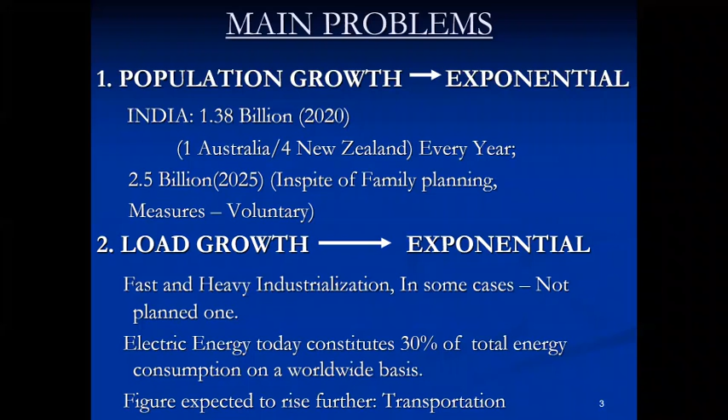Well, our stable government under Mr. Modi is quite stable. The political situation is good, so we can plan strategies and priorities and work for energy and environment. By 2050, there will be only solar and wind - 150 gigawatt solar, 150 gigawatt wind.

There have been four conferences in the world. First was Rio in Brazil. Second was Kyoto in Japan. Third was Paris in France. Fourth was Glasgow in UK.

All these conferences tell us to stop using coal, so that there will be no ash, no emission dispatch, greenhouse gases, CO2, SOx and NOx. All these gases are bad for the health of the people as well as for the buildings.

These gases are raising the sea level. Tomorrow there may not be Bombay, there may not be Madras, there may not be Sri Lanka. We don't want that to happen. We need to have Bombay, we need to have Madras, we need to have Sri Lanka there. So let us stop using more and more greenhouse gases.

Emission dispatch is a very important topic in electrical now, not economic dispatch, because we have to minimize these gases. Similarly, voltage stability is more important than angle stability, because if voltage is within limits, all the equipment will work very well.

Power crunch is a harsh reality since many years for many third world countries, especially non-oil producing, non-OPEC countries. There is no city or village in India where there is no power cut. It varies from 0 to 24 hours.

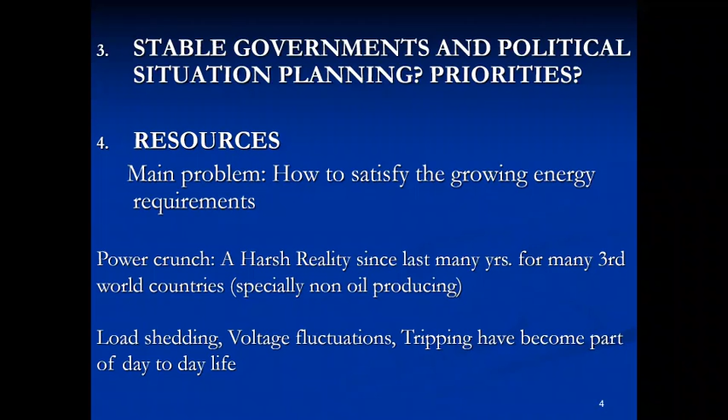Per capita energy consumption: ours is 1200 kilowatt hour. Highest in the world is Norway and Sweden. Australia is this much, USA is 12,632 kilowatt hour, and so on.

So we want to become at least better than China. China is 4,000, so we are trying to go towards 4,000 kilowatt hour per capita energy consumption.

Three conservations are important: energy conservation, food conservation, water conservation. There is no water in Sun City in South Africa. Even in India, as per the NASA report, 10 cities will not have water after 10 years - Nagpur and Chennai are two of them.

So what we should do is have rainwater harvesting and a photovoltaic station on every rooftop. Every house in India should have photovoltaic - India here means the whole third world. We should have photovoltaic power stations and rainwater harvesting, so that we have water as well as electricity.

Then we should have a smart meter, two-way, so that if you sell power, you get money, and if you purchase power, you have to pay money.

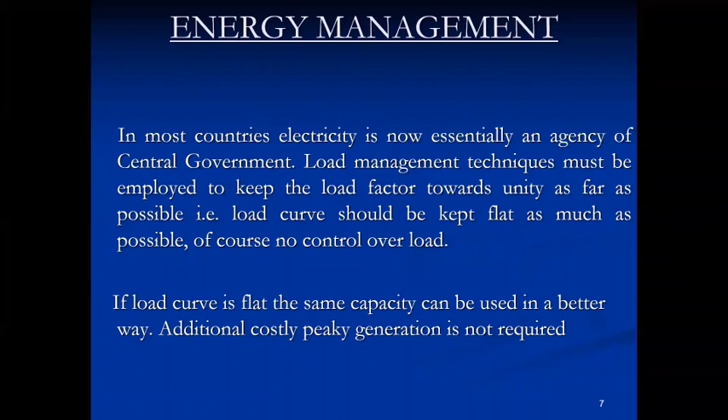Next slide please. Total electric installed capacity.

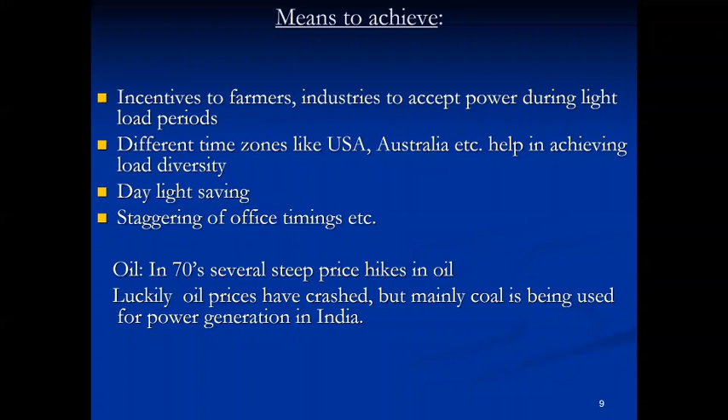As I told you, in 1947 we had 1130 megawatts. Now we have 280 gigawatts - a lot of progress. And there is thermal, hydro, and nuclear - all 3 conventional power.

All 3 are bad. Hydro is bad because we need a lot of space for reservoirs, then there's navigation loss, then there's evaporation loss. Thermal is bad because of pollution, because of acid rain - sulfuric acid H2SO4 and nitric acid HNO3.

So we go for cogeneration, we go for combined cycle power plants. But still thermal is not good, so we go to hydro. Hydro we already have, as I told you, 65 hydro power plants.

And in nuclear, we started in 1969 with the help of 2 great geniuses - late Pandit Nehru and Dr. Bhabha. Tarapur was helped by the US - we used to get enriched uranium, U-235, from US. But then there was a problem with enriched uranium, so we shifted to Kota. Kota was with the help of Canada, using heavy water. The third was Kalpakkam near Madras, 4th was Surat, 5th was Aligarh. In all, now there are 10 nuclear power plants.

Now we have signed a nuclear deal with USA under Dr. Manmohan Singh's prime ministership in 2008, in the Indian Parliament. So now there is no problem in getting enriched uranium. Now we have 100,000 tons of thorium in Kerala and Orissa, so we can use fast breeder reactors and use thorium to generate nuclear power.

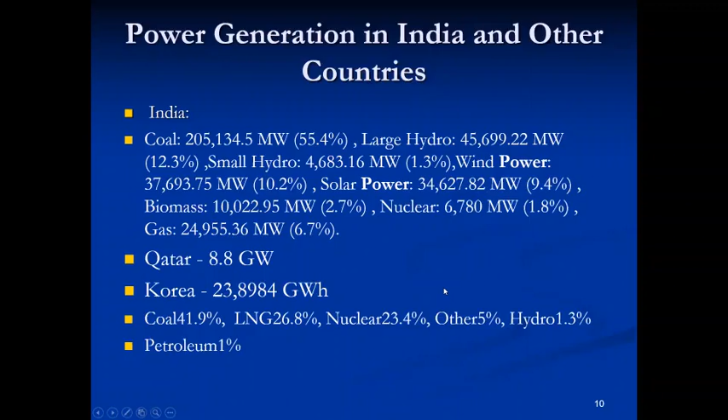1072.46 gigawatt: natural gas, coal, nuclear, wind, hydro, solar, biomass, petroleum, geothermal. Geothermal is there, though 0.4%. Others is 0.4%. Pakistan 148.25 gigawatt: furnace oil 14%, natural gas 31%, coal 16%, hydroelectric 29%, nuclear 4%, renewable solar and wind 5%, and so on.

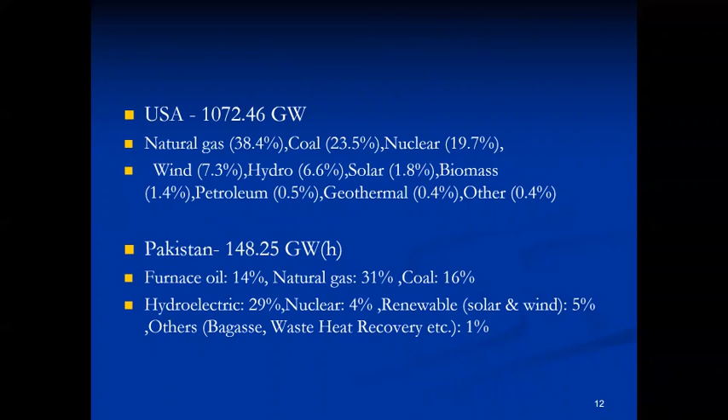Next slide, please. Germany 631.4 terawatt hour. Nuclear is still there. Brown coal is available in Australia - they say you can take it free, but we don't want it, we said no. Hard coal, natural gas, wind - of course Germany has a lot of wind power. Solar 9.1%, biomass 8.7%, hydro 3.7%.

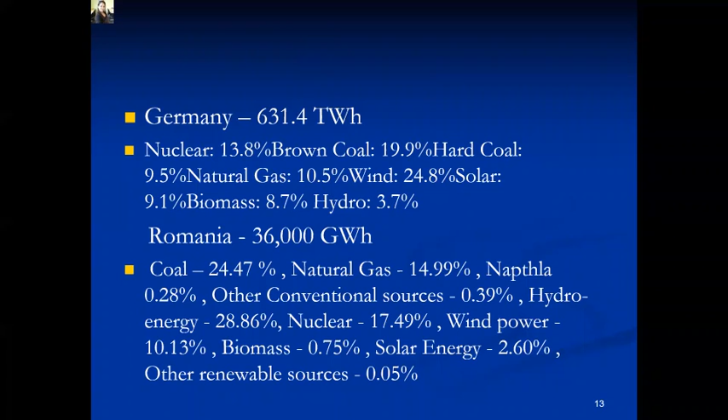Romania 36,000 gigawatt hour, coal. All these things are given, you can read them later.

Next slide, please. Excuse me, Dr. Kothari, we have something like 25, 30 minutes. You want to get to the research? Whenever you say, give me 5 minutes, I'll finish. You don't have to finish, but would you talk to us about research issues? About what? Research issues, recent issues. Okay, yeah, fine, this will finish in 10 minutes.

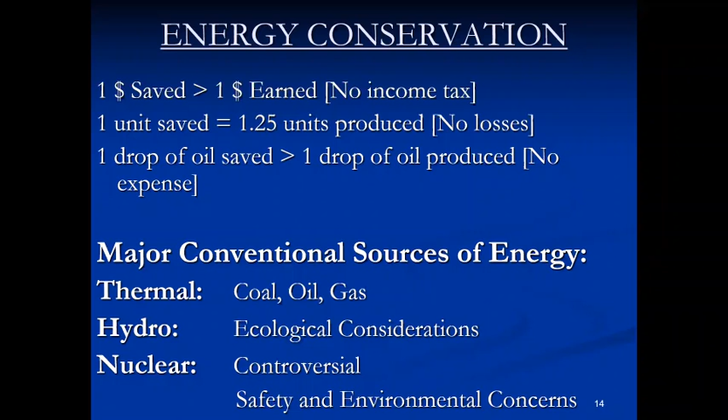Then I'll talk about energy conservation. As I told you, one dollar saved is more than one dollar earned - no income tax. One unit saved is 1.25 units produced, no losses. Okay, next slide, please.

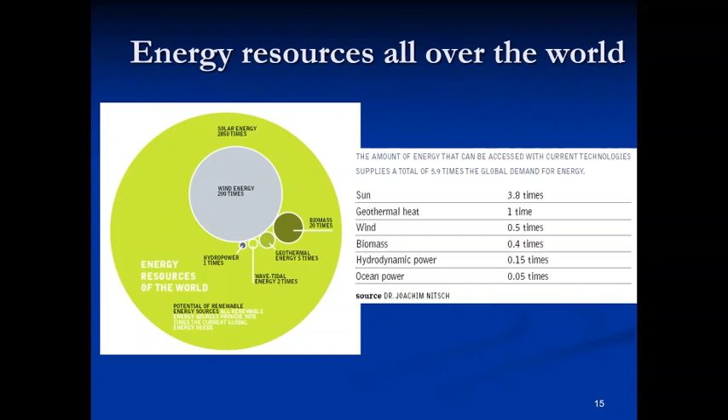Yes, this is energy resources all over the world. This is important data for students who appear in exams in several countries, so that they can ask you about any country. Next, please.

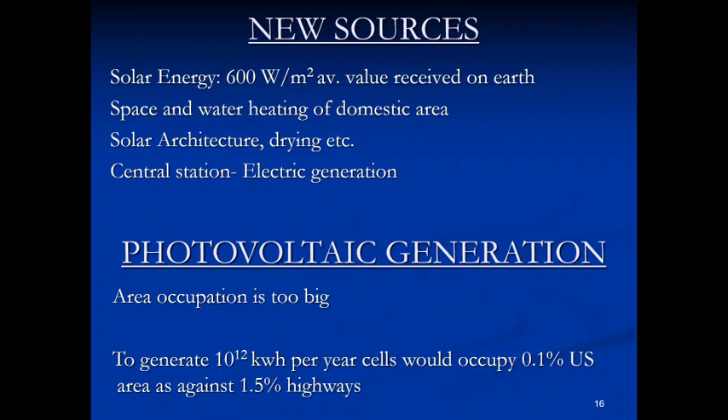To generate 10 to the power 12 kilowatt hour per year, cells would occupy 0.1% of US area as against 1.5% for highways. But that doesn't matter, USA has a lot of space. Next, please.

Windmill, this we have done - USA, Germany, India. Sea wave: in the US we have a Miami power station. Now a similar thing we have started in India, in Kerala - we now have a sea power station.

We have a lot of coastline - whole South India is surrounded by sea, so every 25 miles if you have one sea power station, there will be no energy problem. Then, as I told you, Gujarat is also surrounded by sea, so more and more sea power stations you can have.

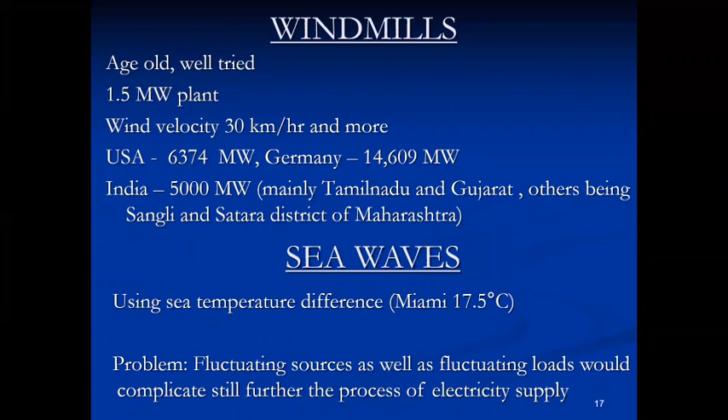The problem is fluctuation - the sources are fluctuating, load is fluctuating. So it's like music: there is a tabla, there is a harmonium, so there is a jugalbandi, as we call it in Hindi. Next, please.

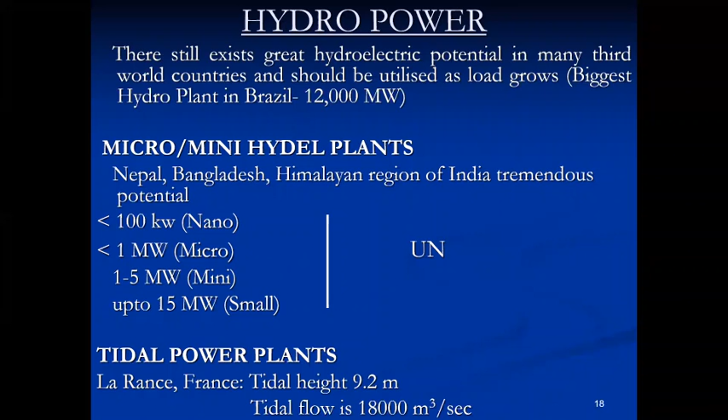Hydropower, I told you about small hydro. We have nano hydro, micro hydro, mini hydro, and small hydro. Small hydro means no transmission line, directly generation and load, so no losses - that's the importance of small hydro. Tidal hydro already talked about. Next, please.

Geothermal we have talked about. MHD, magneto-hydrodynamic generation - they used to have it in the former USSR. We used to have 5 megawatt in India at BHEL, Trichinapalli. Trichinapalli is a town in South India where NIT is located, National Institute of Technology - there are 33 NITs in India, 22 IITs.

MHD plus conventional steam generation has higher efficiency because chemical energy is directly converted to electric, with no mechanical stage in between - less conversions, more efficiency. Like if you take a dollar to India, don't convert it all - only convert what you need, so you can take back the dollar saved and use it in the USA. That's important in MHD: there is only one direct conversion, chemical to electrical, no mechanical in between. Next, please.

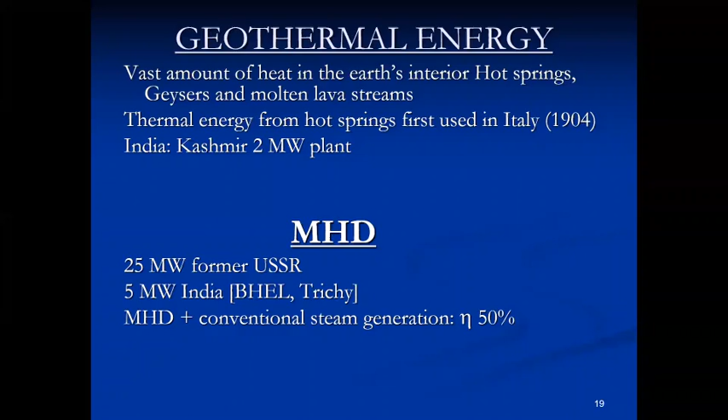Coal, this I think we have done. Ash content, change in boiler technology, fluidized bed combustion technology, that will reduce the pollution. These are the 4 gases I told you to minimize.

H2SO4 spoils buildings and vegetation. The Clean Air Act was passed by USA in 1970 and 1992, and in India we passed it in 1986. The point in India is we do have a law, but implementation is very tough. So the law implementation agency should be strengthened so that we follow the law and have minimum emission gases.

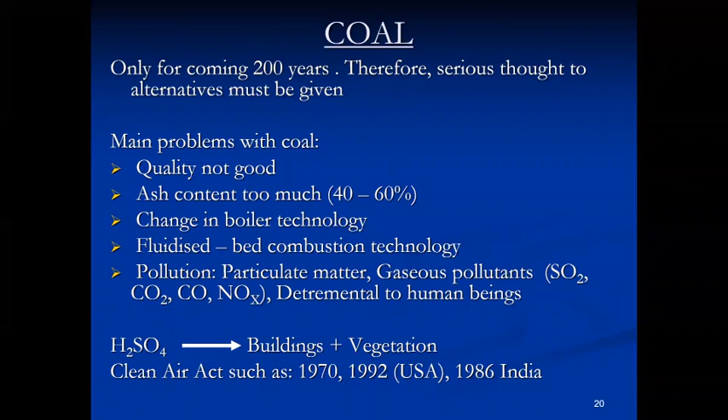Smart grid and electric vehicle, power quality - these are the topics, madam, we are working towards. MTech thesis, PhD thesis, and sponsored research.

We are applying to NSF also. My friend Kishan Baheti used to be there. He is no more, again due to Corona.

And then there is the Royal Society of England from Imperial College London. We have Dr. Vikas Pal, who also helps us in getting some projects from London.

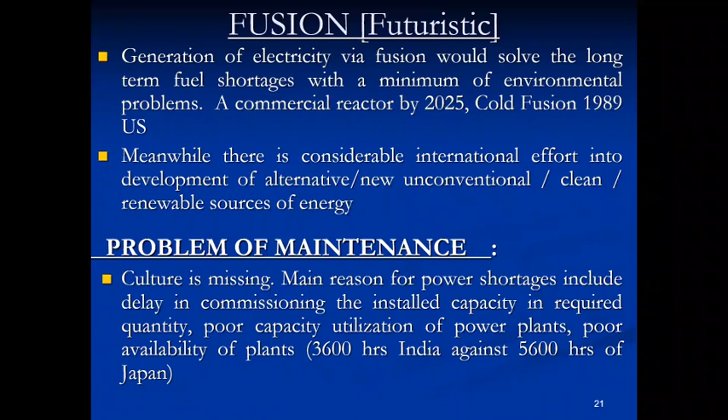Yeah, this is not required. This is India, you know already. We are among the 10 industrialized countries in the world. We have nuclear power, but we don't use nuclear power for attacking any country - it's for peaceful purposes.

We are a member of the Space Club - India could send their people to Mars without any problem, in the first iteration, while other countries took more than one iteration. So we are a member of the Space Club, second largest scientific and technological manpower in the world, and the biggest exporter of manpower. So India is exporting manpower.

Then food - we are self-sufficient now. There was a time when USA used to send us wheat in the 60s. We didn't have enough wheat at that time, so USA really helped us a lot in the past, and now also they are helping. The market is open now.

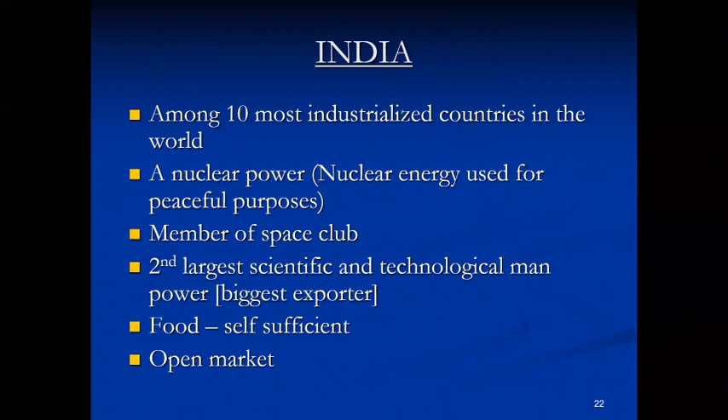Next, please. Australia, we don't have to worry about - you can go to the next slide. You can read them if you want.

Especially if you want to go to Australia. This is not required - I didn't have much time to prepare this for USA. Next time I'll prepare for USA also.

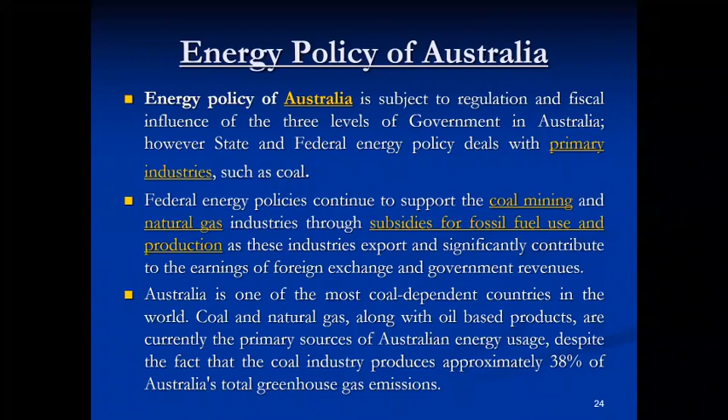I have been to Australia 10 times. I taught there for 2 years at RMIT, Melbourne, Australia. In the US, I went to Purdue University under the NSF program. I worked with Professor G.T. Hare, who is in Arizona State now.

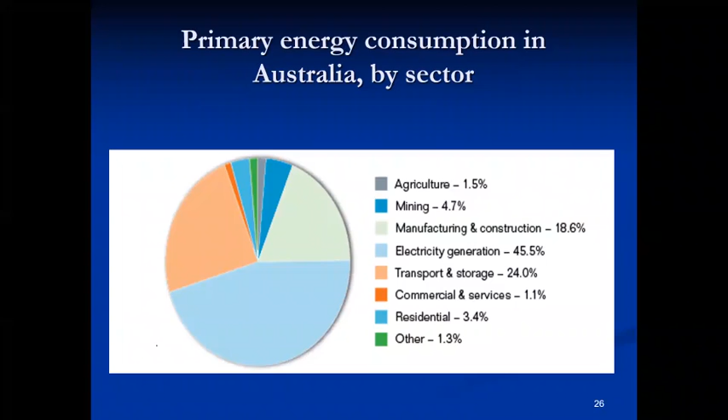Primary energy consumption in Australia, not required. Please go ahead. Coal-fired power, this is all right, but not necessary - go to storage. Storage is the next slide which I want. No, next.

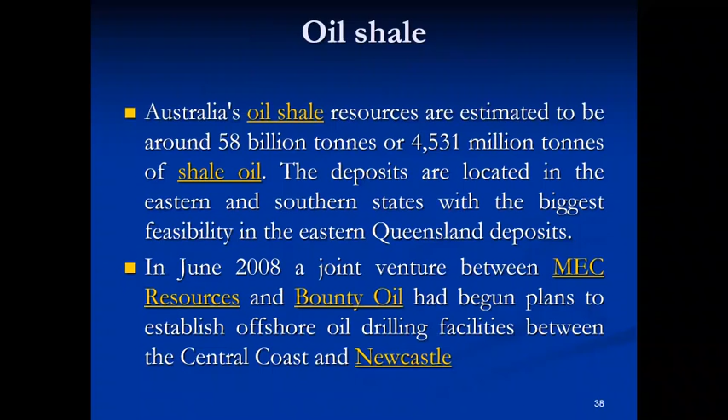No, not required. Next, sir. Yeah, not required - come to energy storage.

Storage is very important because our energy we have to produce as and when required. Best storage is battery. When we were children, we used to play with toys, and toys used to have batteries. Now batteries are there in the laptop from where I am talking to you, and the battery is there in the calculator, programmable calculator.

Everywhere you need battery. Then there is pump storage - I told you about 2 reservoirs, top reservoir and bottom reservoir, with a pump motor set and turbine generator set, reversible. During full load period, we use it as an ordinary hydro plant. During off load period, we pump the water from the lower reservoir to the top and keep it ready whenever needed. There's also compressed air storage and hydrogen. Late Professor Srivastava has done a lot of work in hydrogen - he was in IIT BHU.

Secondary batteries, electric car plus local fluctuating energy source, fuel cell - these are the various energy storage devices. One can write a book on energy storage, one can do a PhD in energy storage.

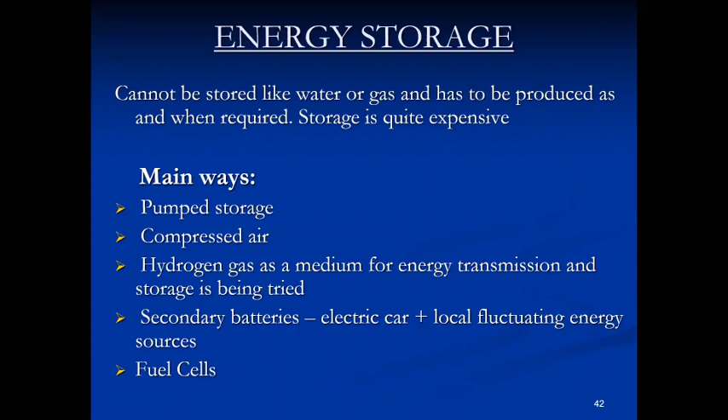Distributed and dispersed power systems: distributed is 1 to 25 megawatt, dispersed is 1 to 2 megawatt. The advantage is they are relocatable, they are modular. You can go on adding 1 megawatt solar power stations, but you can't add thermal power or hydropower in 1 year. It takes a gestation period of 5 or 6 years.

Reduction in environmental pollution, reduced deforestation, small gestation period, reduction of transmission lines. Suitable energy sources: PV, wind, hydro, diesel - technologically available, suitable for rural areas.

I told you poverty alleviation - if you have energy, you can give people jobs. Then you can have more industries, more jobs. The main problem in India today is jobs. We have to create more and more jobs for our population of 1.4 billion.

Substitution, conservation of coal, foreign exchange we can save, saving on investment, employment, operation.

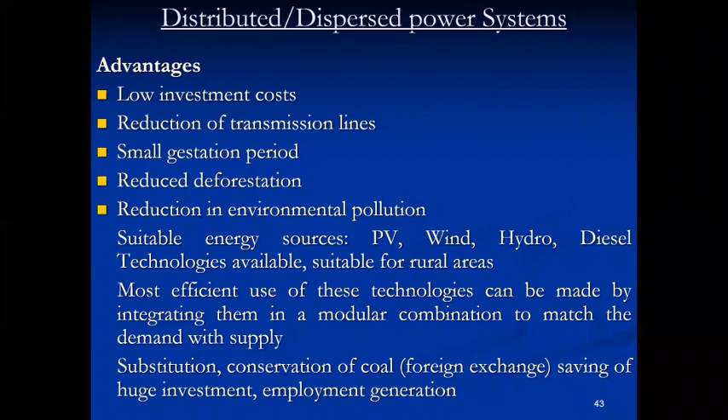Rural electrification we have done, only 85% are electrified. We need to electrify the remaining 15% by 2024, the year in which we have general election, and Modi ji wants to come back again.

So he has to electrify all the villages - reverse migration, I told you to go from cities to villages, not from villages to cities. Main issues: centralized power generation, decentralized, integrated hybrid energy sources, captive power plant, private power generation.

Now in India, there is a lot of private power generation - there is Ambani, there is Adani, there are the Tatas. Tata has just purchased Air India, now it will be called Tata Air India.

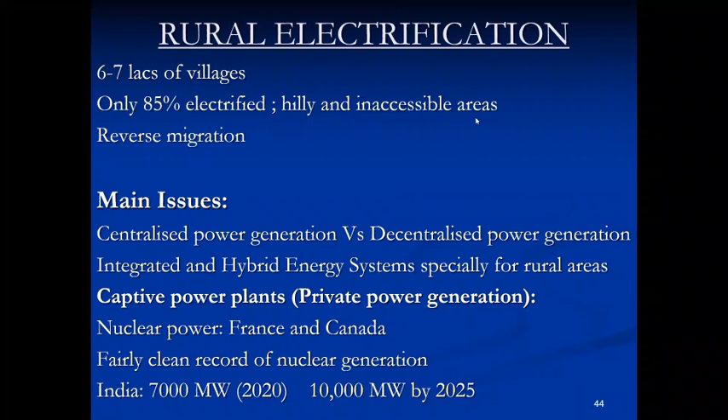So next time you come to India, you can get a fairly clean record. Yes, next please - I'm coming to that, only next, one more slide left. You can go to conclusion.

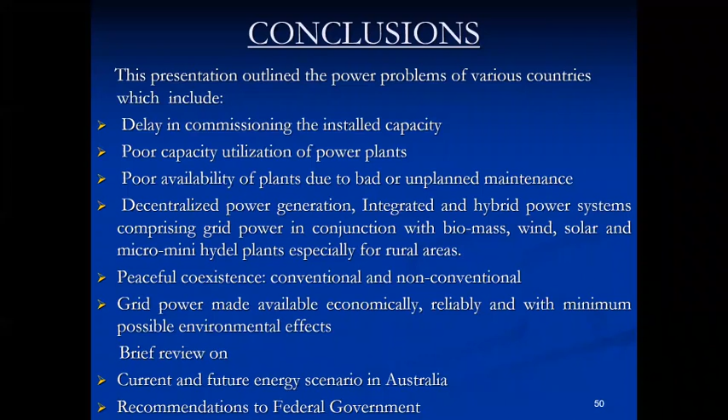So someone taken a photograph? Photograph of my lecture so that I have a memory of you. You also, yes, Dan also. Sure, all these people, can you do sitting here? Please, okay, I'll be thankful to you. And kindly send me. Okay, we will do that.

So I have a question just to open. I think I saw, but he is no longer here. We had Milorad Papic from Idaho, but I think there were a lot of technical difficulties here. So Masood Bharati is here. Third world country, you know. Masood, you don't have any comments?

Yeah, anything, any comment? I'm fine. Anything I can improve in future? Masood has some comments, yeah. Please tell me if I can improve. I'm 77, I don't know how many more years are left. No, thank you, I don't have any comments. So okay, it was a good presentation.

Okay, so I would like to challenge us. I think that engineering probably is not ready with software to operate these systems. What is India doing about getting ready? The thing is, computer systems should be used in power systems, but machine learning, computing are not ready. The old generation software cannot be used. So could you comment on what India is really doing about providing the changes in operating rules and also in software that's needed for the new resources to be integrated?